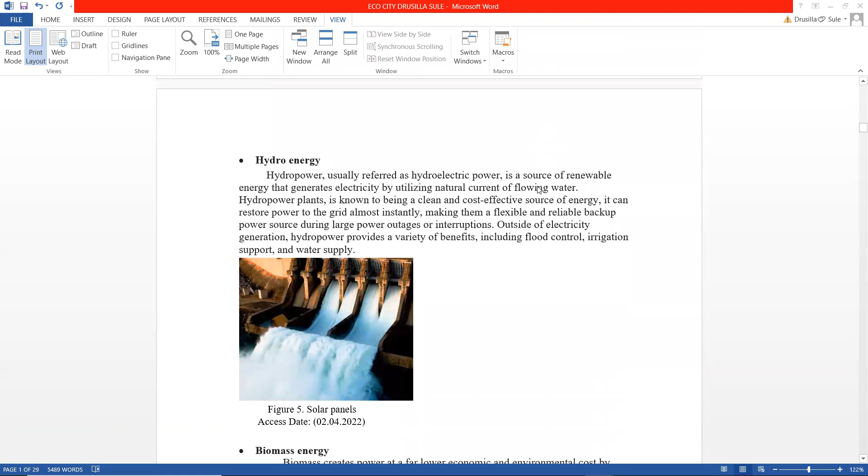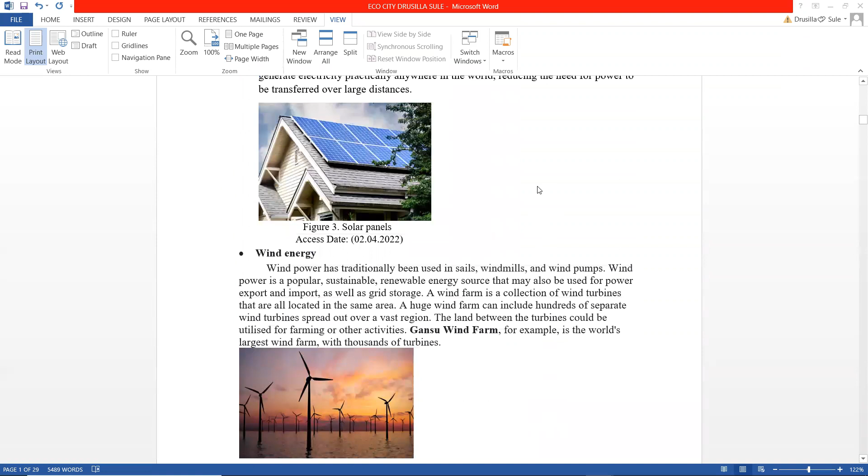Now for the concept of eco-city, we look at what really makes up an eco-city. In this area, I talked about solar energy, wind energy, hydro energy, and biomass energy. All these renewable sources of energy can be used in eco-cities to generate their own energy.

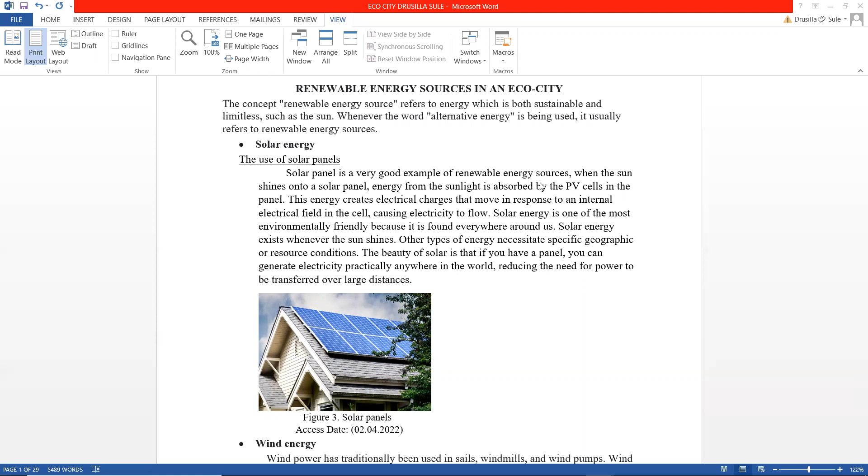For solar energy, solar panels are used, and it has become the most popular source of renewable energy. Sun shines directly onto a solar panel, and energy is absorbed by the PV cells through the electrical field inside them. This can be used in homes, for example to power street lights, EV charging stations, and rechargeable cars and bicycles for transportation.

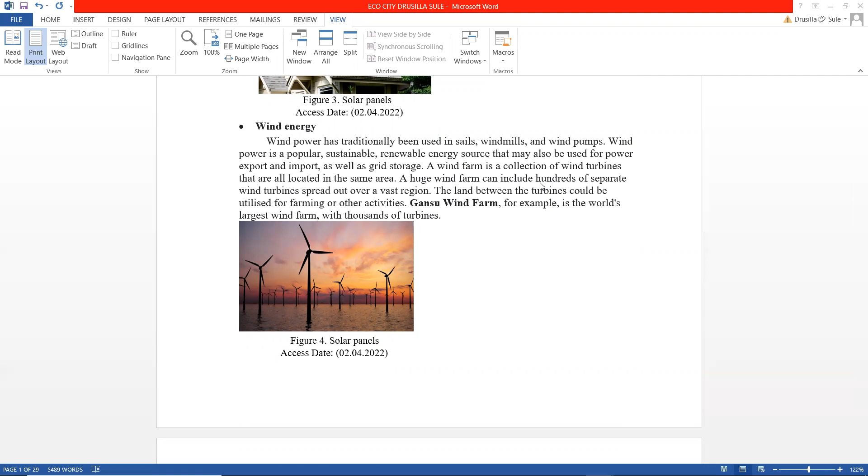We also have wind energy, another type of renewable energy source. An example is found in the Gansu wind farm, known as the world's largest wind farm, with thousands of turbines.

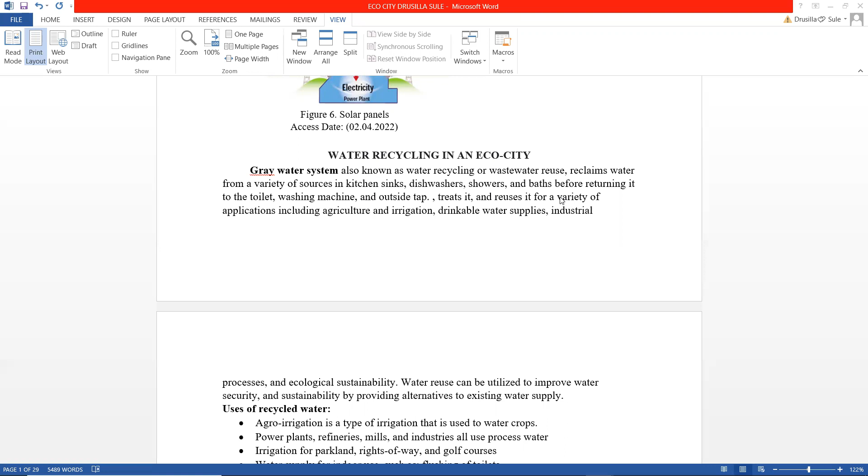We also have hydro energy and biomass energy, and I briefly talked about water recycling in eco-cities. We have a grey water system, also known as water recycling or wastewater reuse, which reclaims water from sources like kitchen sinks, dishwashers, showers, and baths, recycling it before returning it to toilets. It can also be used in washing machines and outside taps, for example for car washing.

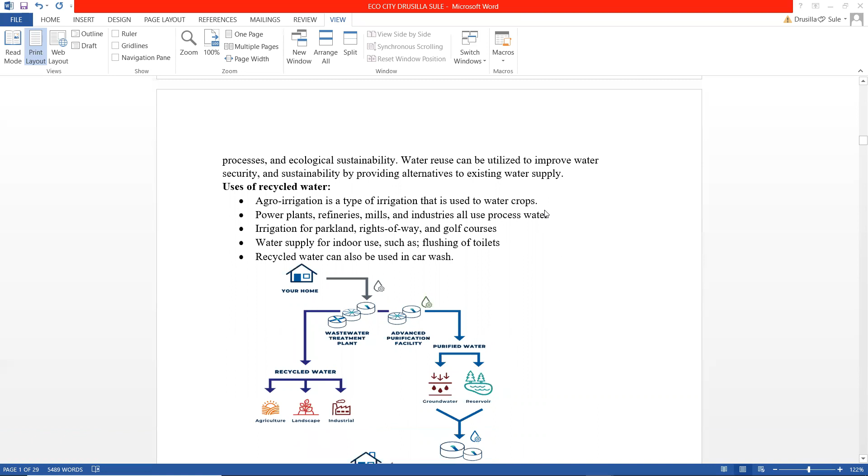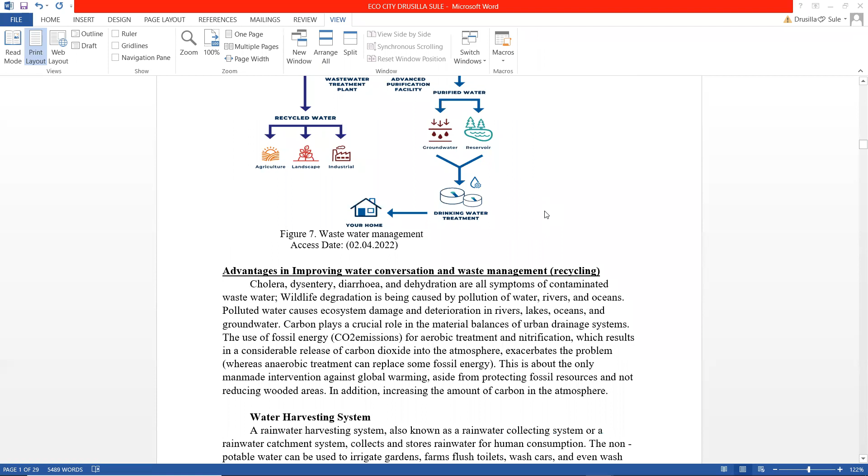I briefly explained how recycled water can also be used in the agro industry, along with its advantages in improving water conservation and waste management. As we know, water is essential in our environment, and it is necessary to have clean and potable water in the city.

Another system is the water harvesting system, known as a rainwater collecting system or rainwater catchment system, which collects and stores water for human consumption. Non-potable water can be used in irrigating gardens and farms, and also to flush toilets.

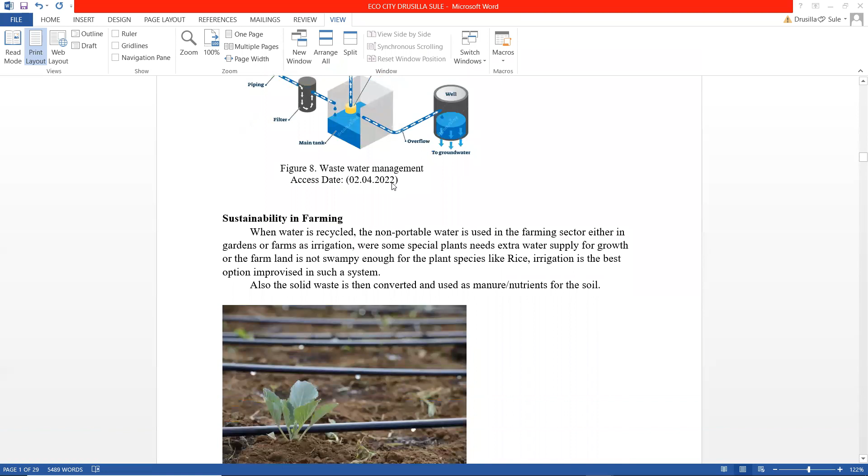I talked about sustainability in farming, how organic waste can be used in the farming sector as organic manure, and how non-potable water can also be used as an irrigation system on the farm. This picture explains what the irrigation method is.

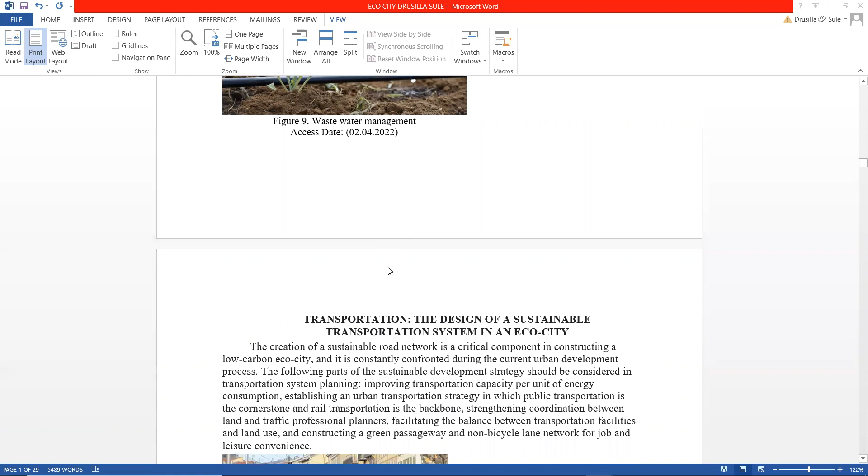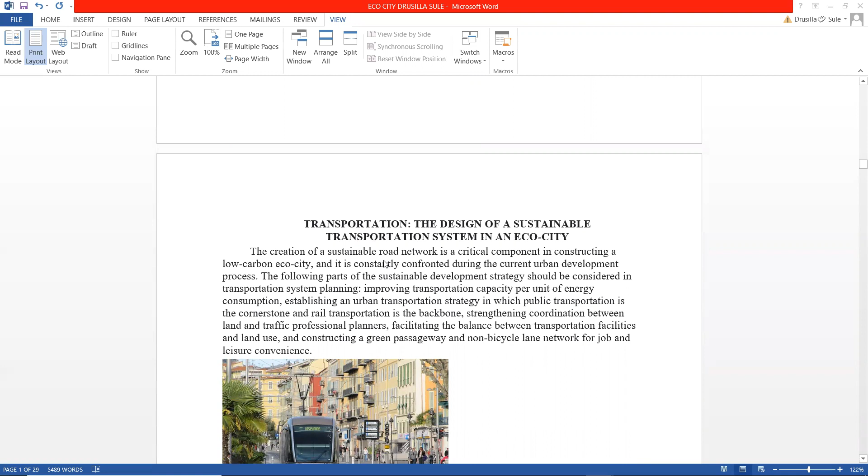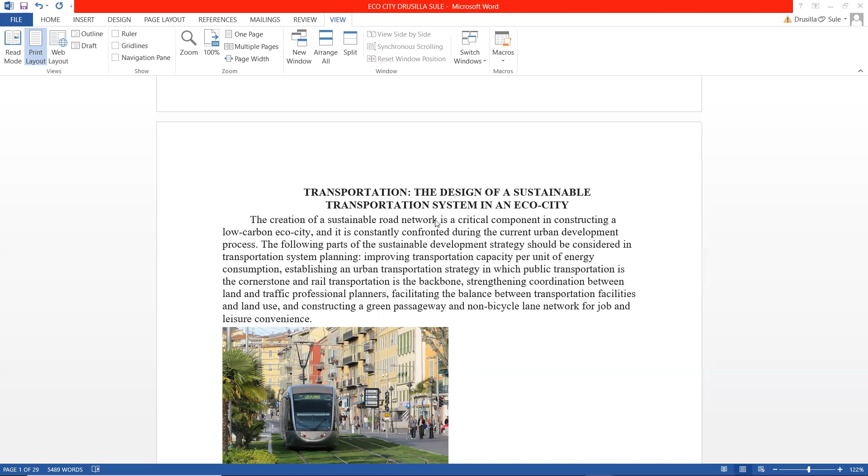Transportation is another key factor in eco-cities. It's necessary to have an eco-friendly transportation system. The creation of a sustainable road network is a critical component in constructing a low-carbon eco-city, and it is constantly confronted during the current urban development process. The following parts of the sustainable development strategy should be considered in transportation system planning, and to improve the transportation system, road networking needs to be studied very well.

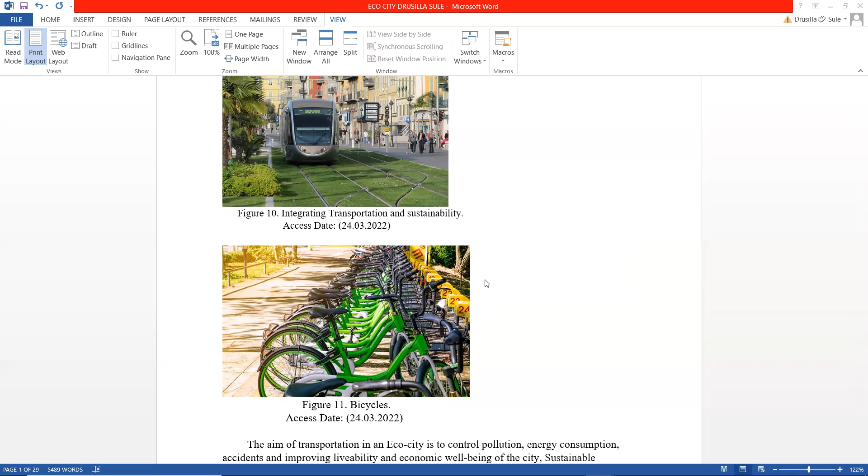We also have bicycles. While designing an eco-city, it should be considered where the bicycle path should be positioned, as well as the pedestrian walkway.

We also have EV charging stations in eco-cities. As a result of rising interest in electric vehicle technologies and the cost reduction of photovoltaic systems, the industrial development of solar-powered battery charging stations for electric vehicles has really progressed, although it is more efficient to charge electric vehicles at night when power consumption is lower.

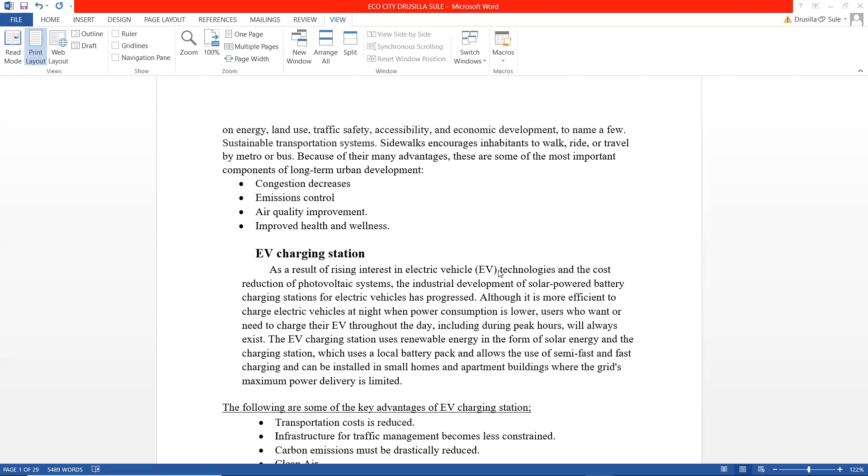Implementing green architecture is an important component of sustainable development and city planning. Green architects are coming up with new ways to conserve resources and minimize greenhouse gas emissions, using natural construction materials and solar panels to achieve better ventilation and insulation, more shade trees, and smart HVAC systems. Green buildings can earn LEED certifications by meeting certain criteria.

I also talked about materials. In designing eco-cities, it is necessary to choose the right eco-friendly materials in the finishing and construction process, as well as for the city itself.

Some examples of eco-cities were also studied in this research. We have one of the most popular eco-cities in the world, called Masdar Eco-City in Abu Dhabi. Its client is Abu Dhabi, and the architect of this project is Norman Foster. It was designed in 2006, and Masdar City is a zero waste, carbon neutral city created in Abu Dhabi, United Arab Emirates.

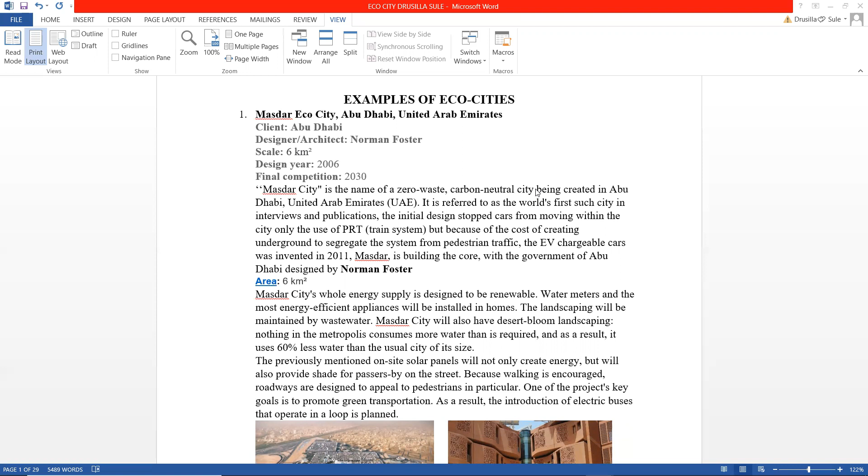It is referred to as the world's first such city in interviews and publications. In Masdar City, the whole energy supply is designed to be renewable. Water meters and the most energy-efficient appliances will be installed in homes, and the landscaping will be maintained by wastewater as well.

This is just a brief explanation and some pictures of what Masdar City Eco-City looks like.

Briefly, we'll talk about Batikent Eco City, located in Ankara, Turkey. Its client is Kent Coop, and the designer of this project is Vedat Dalokay. It was designed in 1974 and completed in 1983. Batikent is located in Ankara, the capital of Turkey, about 11 kilometers from the city center, and the project was initiated by the architect Vedat Dalokay.

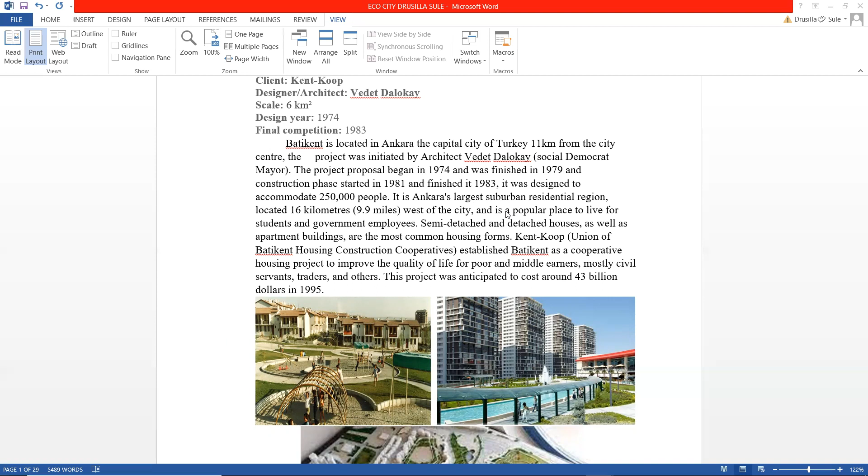The project was proposed in 1974 and finished in 1979, designed to accommodate at least 250,000 people. It is Ankara's largest suburban residential area, located 16 kilometers west of the city, and a popular place to live for students and government employees. This is what Batikent Eco City looks like, along with the site plan here.

We have another example of an eco-city, Solar City in Austria. Its client is the municipality of Linz, and it was designed by Atelier Dreiseitl. It was designed in 1998 and completed in 2001. Solar City is known to be an energy-saving district where houses are designed to use low energy.

Linz is a town in Austria located between the Traun and Danube rivers, which was in desperate need of development. However, being trapped between two rivers, finding a suitable location for expansion was not an easy task. But the project was realized, designed to accommodate 25,000 people. The design was inspired by green garden cities and recreational facilities like swimming ponds, water playgrounds, and green vegetation to keep residents close to built-up areas. This is what the Eco City looks like in Austria.

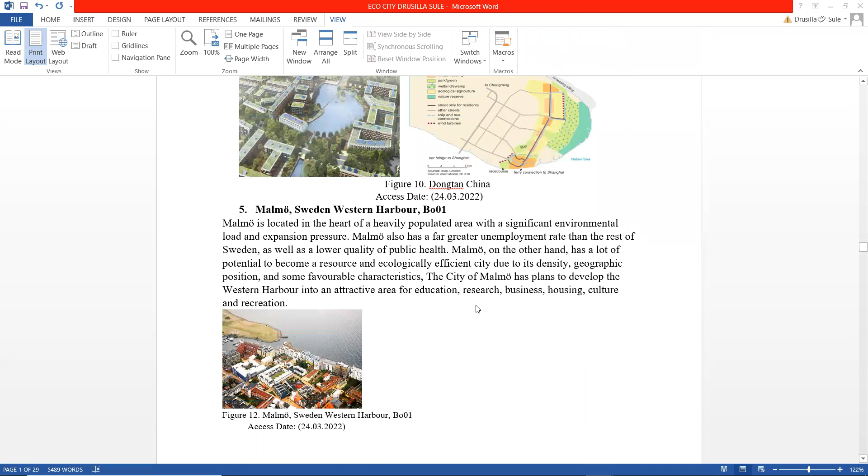We have another example, Malmö, Sweden. Because of our time, I'll just briefly explain this one.

We have a matrix for each of the eco-cities which explains the construction year, the project description, the project start and completion year, the population, the production cost, the area, the transportation, and how water conservation is being recycled, as well as the type of energy used and the transportation system. Each of these is explained in the matrix table, but because of our time I'll be very brief about it.

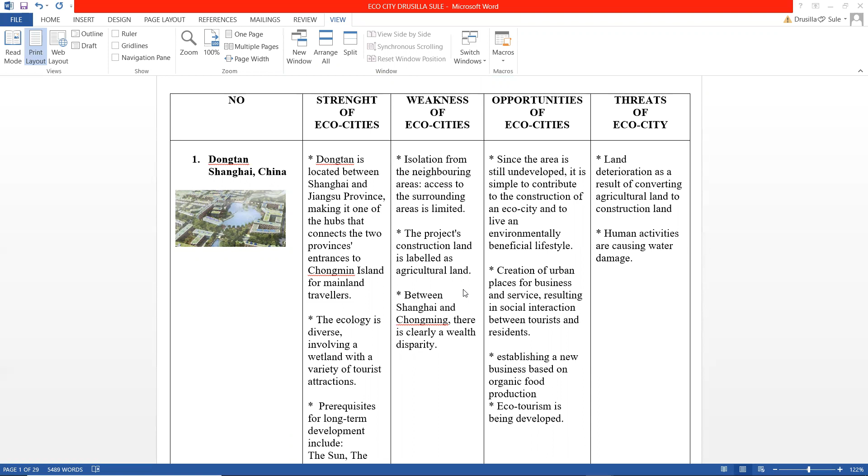A SWOT analysis was also made for each of the eco-cities, explaining the strengths, weaknesses, opportunities, and threats each tends to face—some facing them already, and some likely to face them over time. We talked about Solar City, Sweden, and Malmö, and this is the second phase of the project, which is the project proposal.

I proposed a site in Lefke, Northern Cyprus, to be called an eco-city. In this project proposal, a detailed analysis was carried out in the city of Lefke, located in the district of Güzelyurt, Cyprus.

This site is closely located to Lefke University, which is designed to be an eco-friendly institution serving students and everyone in the district. This university will serve as an extension to this project proposal, and more housing units, healing centers, daycare, eco malls, banks, and recreational centers will be designed to fit in as an eco-city.

Transportation and road networking systems will be studied, as well as water conservation, agricultural extensions, and energy conservation.

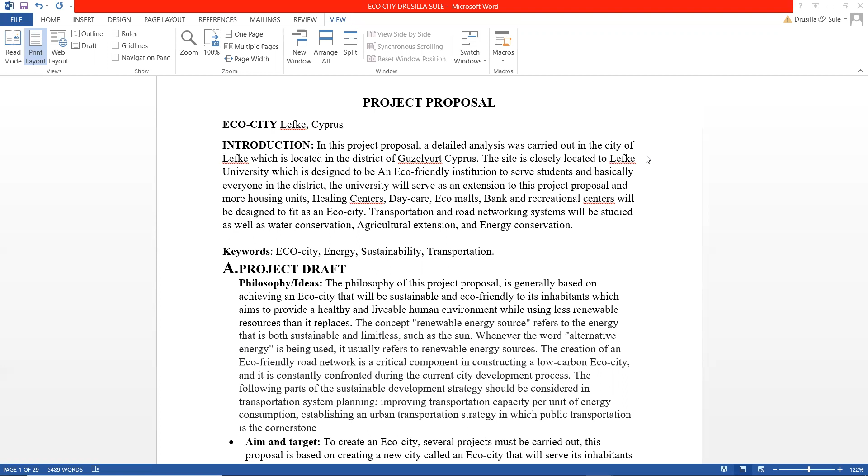The philosophy of this project is generally based on achieving an eco-city that will be sustainable and eco-friendly to its inhabitants, which aims to provide a healthy and livable human environment while using less renewable energy sources than it replaces.

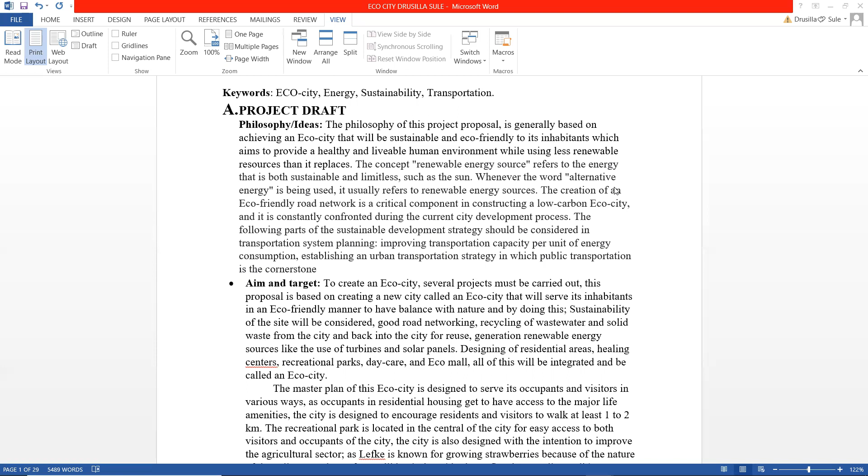The concept of renewable energy source refers to energy that is both sustainable and limitless, such as sun. Whenever the word alternative energy is being used, it usually refers to renewable energy resources.

The aim and target of this proposal is to create an eco-city with several projects that must be carried out. In this proposal, we're going to look at how it serves its inhabitants in an eco-friendly way, from transportation to energy usage, and also the functions of the city.

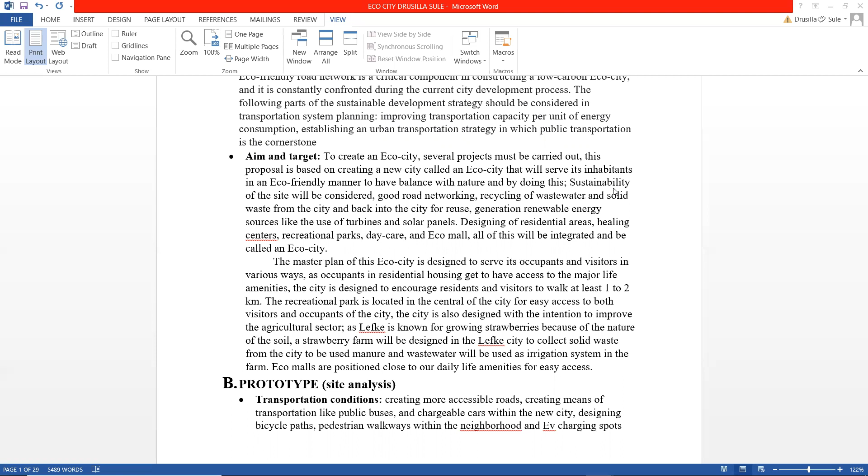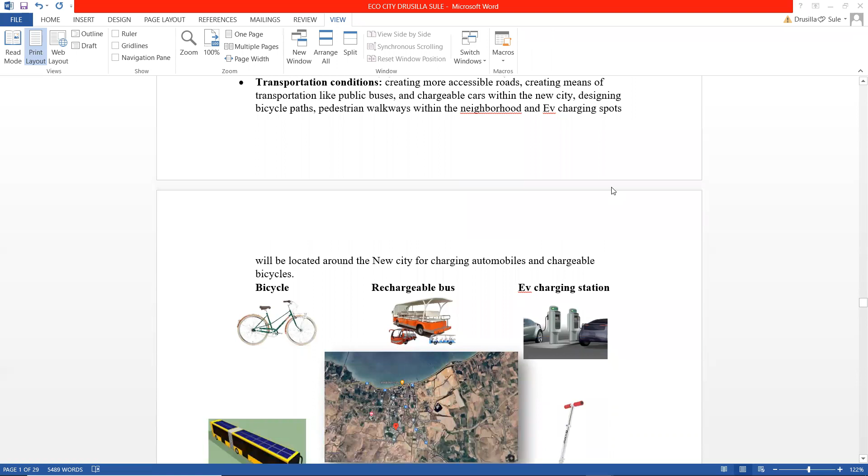So this is a prototype of the site analysis. We have the transportation conditions. As we can see, there will be bicycles functioning in the eco-city in Lefke.

Rechargeable buses will be used as well. There will be EV charging stations for charging bicycles, cars, buses, and we have a photovoltaic bus here, which uses the solar panel on top of it to power energy, and also a scooter.

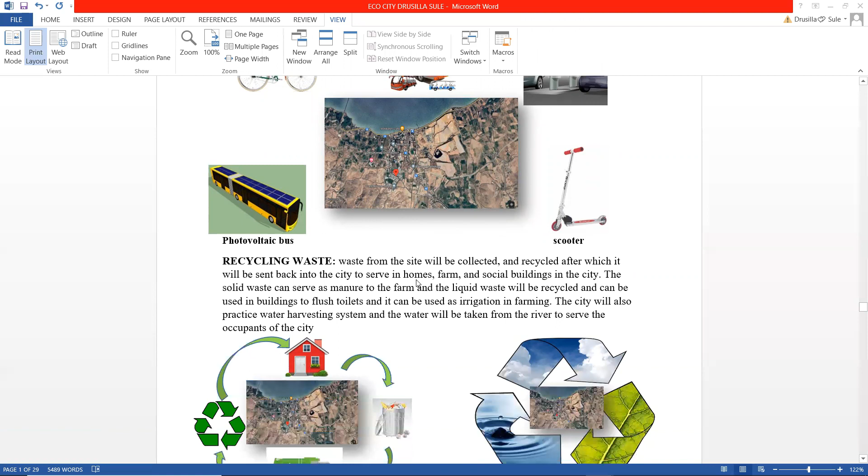And this is the recycling system of how the Lefke eco-city will work. The solid waste will be separated from the liquid waste. The solid waste can be used, like I said, in farms for organic manure, and the liquid waste will be recycled and taken back into the city.

And as we see, we have the water body over here, which will also serve the city in a very, very big way.

Just a brief history about the flora and fauna of Lefke. Lefke is the only place in Cyprus where Jaffa oranges are farmed, and it is also known for soft fruit cultivations. There are 3 dams that supply consistent water throughout the year to the farm, which is why agriculture thrives very well in this area.

This place in Lefke is known for farming Jaffa oranges and also strawberries. So I have decided to also design a strawberry farm in the eco city, which will help to boost the country's economy and also serve the inhabitants of the eco city.

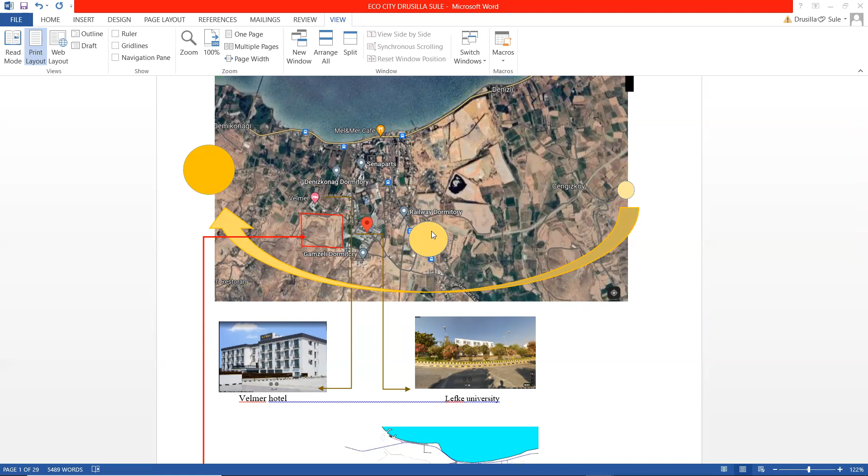This is a brief site analysis where the sun rises and where the sun sets. The sun sets directly where the greenhouse I have proposed in the Eco City will be. A greenhouse is known for collecting direct sunlight to help the plants, as it serves as nutrients for the plants. So this direct sunlight coming into the greenhouse plays a very major factor.

So I have designed the sites, the Eco City, according to its site analysis which has been carried out. There's an existing university, called Lefke University, just around the corner of the site, which will also serve in the Eco City because Lefke University is an eco-friendly institution as well.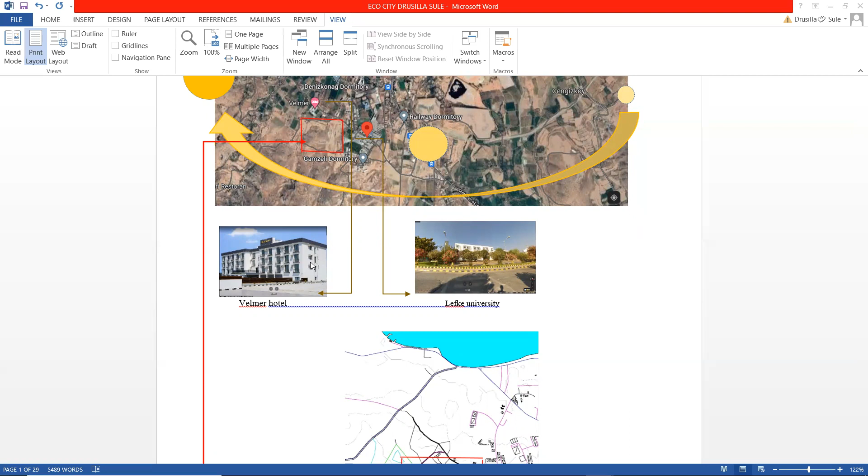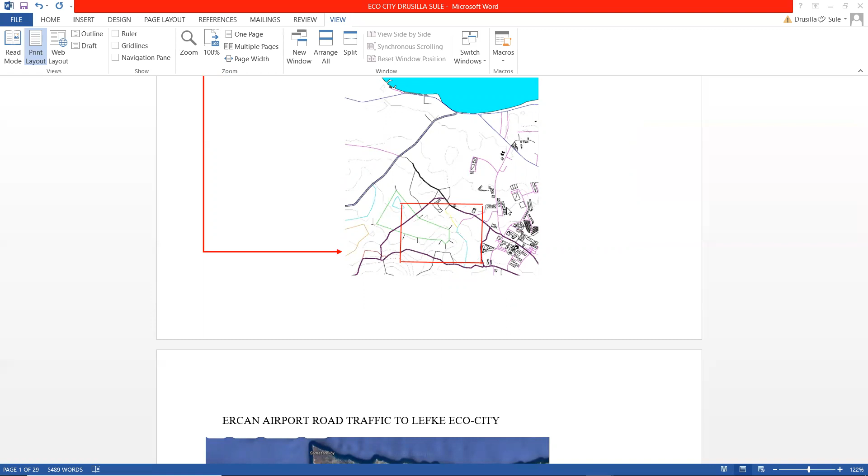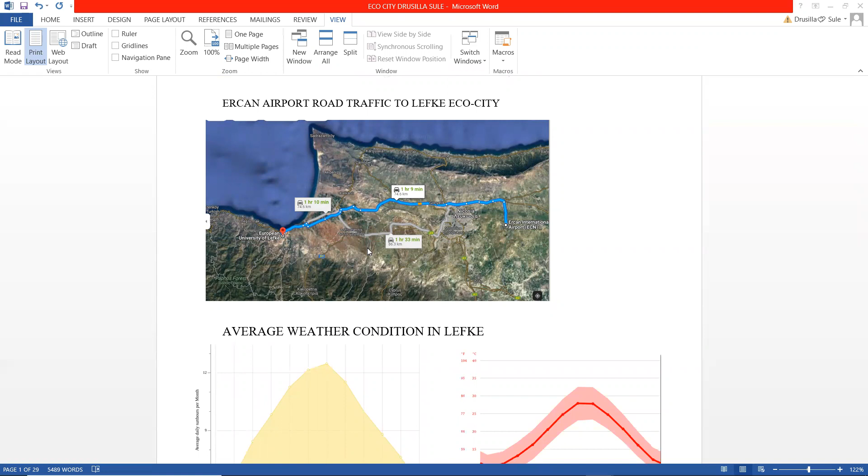There's an existing hotel right there, the Velmer Hotel, which will also serve in the Eco City. This is the proposed site which I have chosen to work with, and beside it, we have the Lefke University. And a brief study of the road networking from the airport to the site by car, by road.

A brief weather analysis was also studied about the sites in Lefke, and the building program as well, where we have recreational parks, greenhouse, strawberry farm, bank, residential housing, eco mall, daycare, and the healing center.

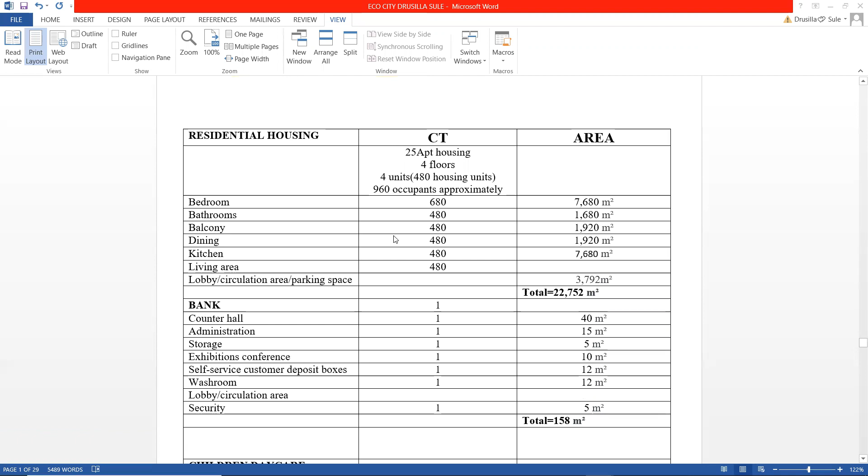This is the space analysis for each of the functions of the Eco City, just to help in the design stage.

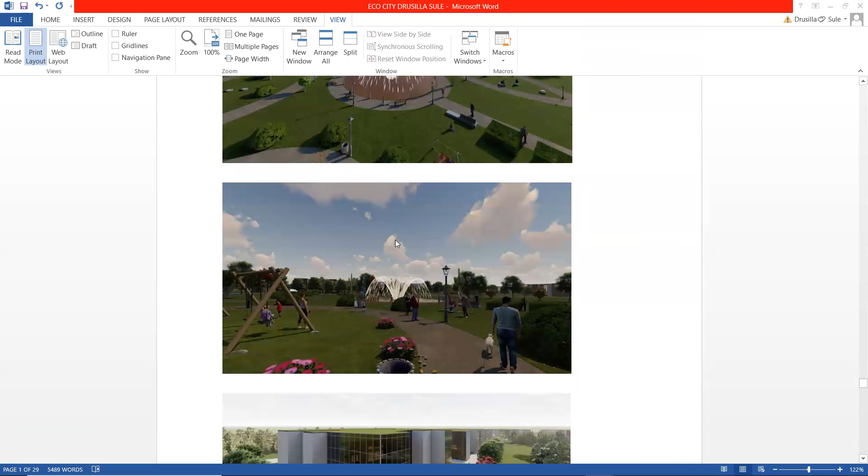So here we have the master plan and the rendering of what the Eco City should look like, from the recreational park to the residential housing.

And then I talked briefly about the greenhouse, how the greenhouse is supposed to function. And then here is the plan of the greenhouse as well.

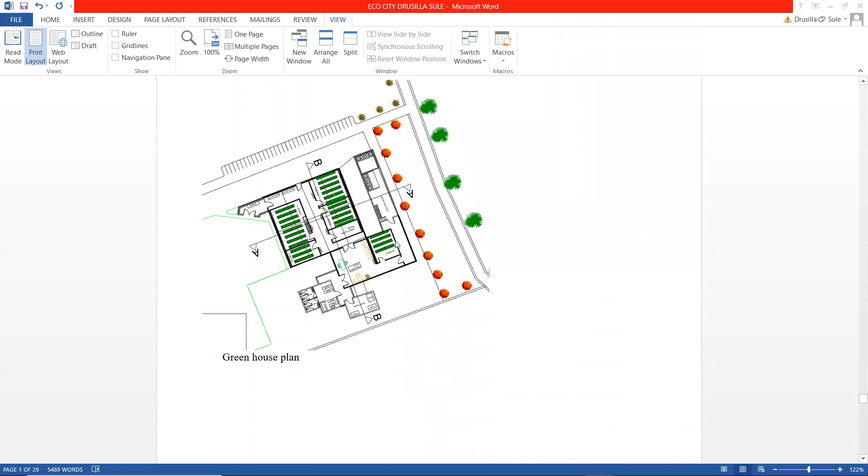There is a 3D rendering for the greenhouse. Basically, as we can see, the use of glass on the greenhouse helps in collecting and retaining sunlight, which shines during the day. There are solar panels placed right on the green roof, which also collect energy during the day, and the plant receives energy which is saved from the solar panels at night.

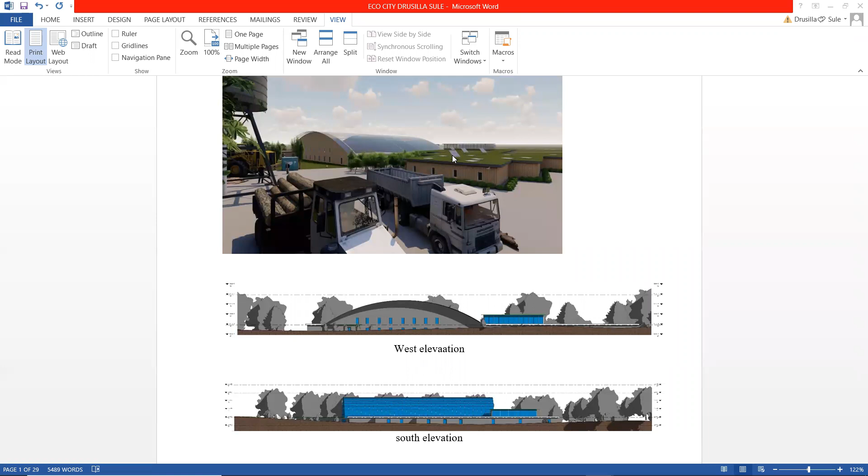The sections and the elevations of the greenhouse.

So in conclusion, Eco Cities and Eco Cities under construction all work to achieve the same goal, which is to have an environment that is sustainable and free from pollution. In this research, different eco cities were studied, from how energy is generated using renewable energy resources, implementing transportation means that are environmentally friendly, without fumes and other dangerous hazards, studying waste management and waste recycling.

The study of strengths, weaknesses, opportunities, and threats - the SWOT analysis - was carried out. Lastly, all these studied factors come together to show that eco cities all have the same view of achieving the same thing by using various systems. Eco cities should be practiced in the world at large, and by achieving this, awareness needs to be passed across for countries and cities to be enlightened, to know that a city can work towards being toxic free. Thank you so much for listening to this presentation.